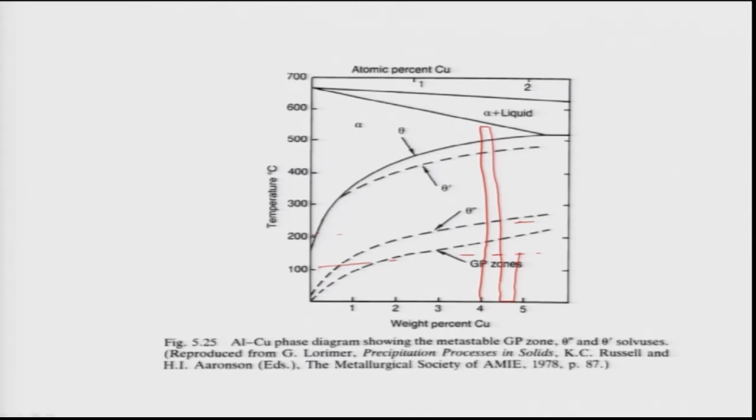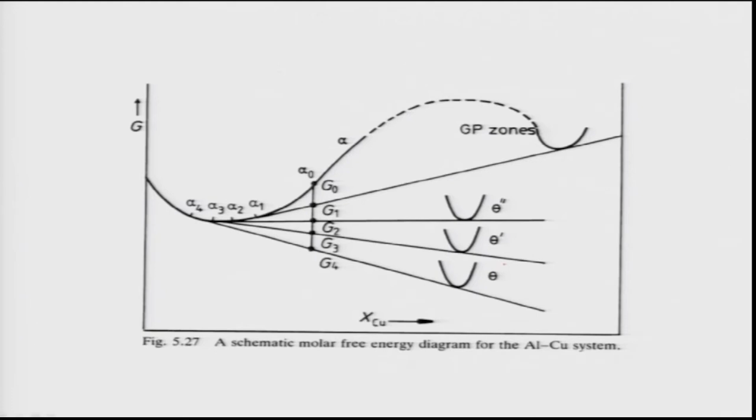And I have told you that this can be explained using a free energy composition diagram like this. Let us not go back into that. It helps you to explain different equilibrium compositions between these transient phases, GP zones, theta double prime and theta prime, with the alpha, and this can be easily described.

To give you a perspective, the GP zone is nothing but a few layers of copper atoms sitting on the 100 planes of the alpha aluminum lattice, and theta double prime and theta prime are coherent structures along different interfaces as described here. Theta double prime has coherency along all interfaces, therefore it retains low energy interfaces with the matrix.

Theta prime is coherent or semi-coherent along 001 planes, but non-coherent on 100 or 010 planes. On the other hand, theta, the equilibrium precipitate, is a completely incoherent structure. So, the transient phases help us produce different kinds of interfaces between these phases and the matrix. This is what I told you. And some of the microstructures I showed you again, because this helps you to understand.

GP zones are nothing but an extra 1 or 2 layers of copper atoms on the aluminum 100 planes, so they lead to a strained matrix which is shown here. Similarly, theta double prime is also coherent along all interfaces. It can lead in the microstructure to a coherency strain, which we discussed in previous lectures. So this will lead to a strained matrix, seen here. These are the theta double prime precipitates.

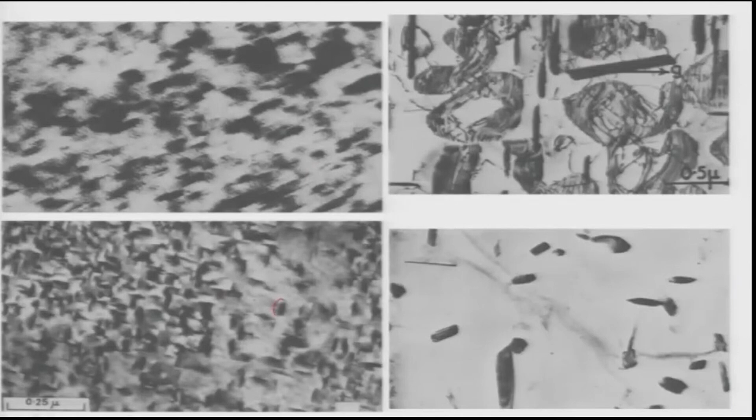Theta prime precipitates look much bigger, elongated, and theta is a very well defined precipitate with no coherency along any of its interfaces. And obviously nucleation of these phases happens along the grain boundaries or dislocations, and this can be used to alter the microstructures. As you see here, a grain boundary is present on which theta is precipitated. Similarly, theta prime has precipitated along a certain grain boundary.

So it is possible to nucleate these precipitates along the defects in the matrix. That was recapitulation. Now let us first discuss what actually happens when you heat treat these alloys during aging treatments.

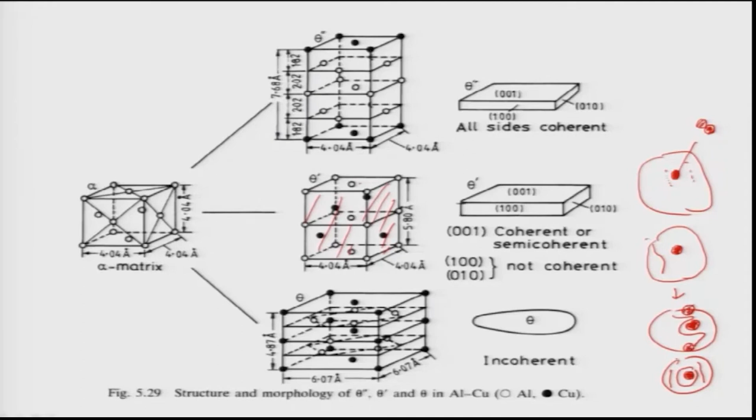So, more dislocations pass, more loops will be forming around these precipitates, and the stress field generated will be higher, and that gives this strength. But remember, this depends on the distance between these precipitates. The precipitates have to be at a particular separation, otherwise this kind of bowing of dislocation leading to formation of a loop will not happen. So, that is why the precipitate size must be a little bigger as compared to theta double prime.

Theta, on the other hand, is basically a completely incoherent structure. So, the only way a dislocation can pass through is making loops around it, and they will obviously be bigger in size because the growth will happen at a higher temperature and time. Because of that the material loses strength slowly, and that is why the hardness slowly drops off. So, that is the main reason why you see such aging curves in the microstructure or in

the real heat treatment. So, therefore, if I want to create a good material for various potential applications, we need to have combinations of good hardness and ductility, and that is only possible on this side of the curve, on the rising side of the curve. That is what I am showing you here in all the cases. So, if the heat treatment temperature and time are selected properly, hardness can be made on the increasing side of these hardness plots, and then we can achieve a good combination of strength and ductility.

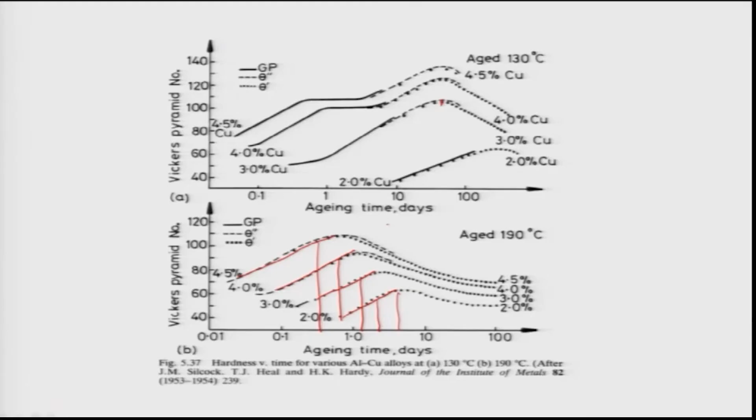That is what is actually done. So, the selection of the heat treatment temperature and time has to be judiciously done, otherwise alloys will not be applicable in real applications. That is a very important aspect which you must remember. There are other things you should also remember. These precipitates are forming or nucleating on the grain boundaries or on the internal dislocations present near the grain boundaries as well as within the grains.

So, we can improve the aging efficiency, or the ability of the alloy to age very nicely, by adopting two different approaches. One, which is very routinely done, is that after solution treatment followed by quenching, the alloy can be given a plastic deformation, simply rolling it or giving a forging treatment. By doing that, we create a large number of dislocations or defect structures in the sample, and then this is followed by aging treatment, that means the deformation is given prior to the aging treatment. Deformation leads to dislocation and defect structures, and these defects allow the nucleation of the precipitates very easily. So, one of the ways to achieve faster aging and better distribution of the precipitates in the microstructure is to give a plastic deformation prior to the aging treatment.

The other way is to use what is known as double aging treatment. Double aging treatment means we can have aging done at a lower temperature, something like 120 degrees Celsius, and this will only lead to formation of GP zones. A large number of GP zones will form because other precipitates will not form at that temperature. GP zones will preferentially form across the whole sample. Then this sample can be taken to a higher temperature, something like 170 to 175 degrees Celsius, and kept there for some time. As the GP zones have homogeneously formed because of the lower aging temperature in the first stage, this will allow the precipitation of theta double prime and theta prime easily on the GP zones.

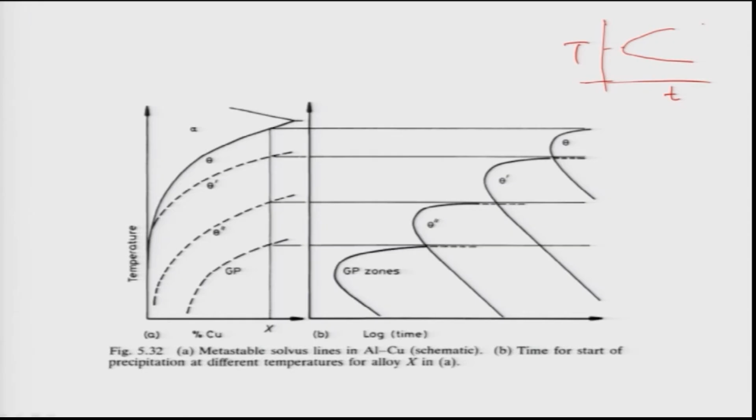Now we can have something like nucleation and growth kinetics built into that, and these curves are obtained like that. Obviously this looks like a Johnson-Mehl equation which is available for the steels. Why? Because if you look at any transformation, if I plot temperature versus time, transformation will be maximum at some intermediate temperature; at higher temperature it will be lower, and at lower temperature it will be lower. This is mainly because at higher temperatures the driving force available is low, so therefore nucleation and growth rates are low.

But at lower temperatures the nucleation driving force will be higher, but because diffusion is slow, growth will be slow in a precipitation hardenable or diffusional transformation. So that is why you always see a C-shaped curve. At the intermediate temperature, both the optimum value of nucleation rate and growth rate can be achieved, because diffusion as well as the driving force both have to be optimally chosen. And that is why all these curves have a C-shaped nature.

And GP zones, because they form at a lower temperature, will be starting at a lower time scale and lower temperature both, followed by theta double prime, theta prime and theta. So these curves allow you to select the heat treatment cycles, right. You can clearly see this is the log time, this is the temperature.

So if I simply do a double heat treatment, first I can simply allow these things to happen like that. So a large number of GP zones will form in the microstructure, then I can heat it up to a little higher temperature and keep it there a long time. So it will allow me to form a large number of theta double prime on the existing GP zones, and that is why it can be done.

In fact, in many actual practices, sometimes people give a 3-stage heat treatment, heat it up and keep it there also. So you can actually have combinations of GP zones, theta double prime and theta prime forming in the microstructure and give you the optimum value of the hardness. So such TTT curves or time temperature transformation curves allow you to select your heat treatment cycles very nicely. Okay, so that is the important part.

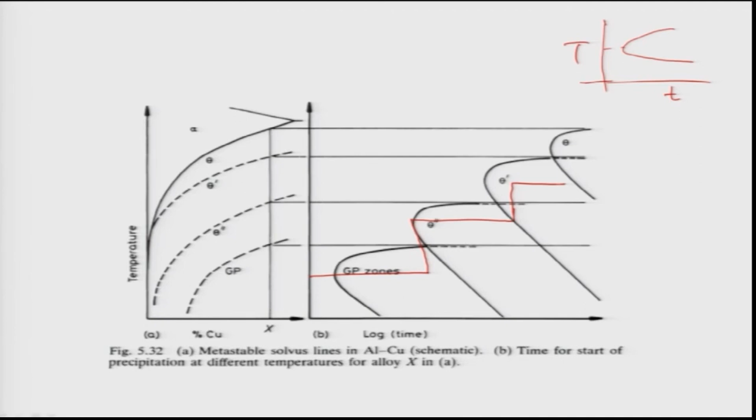And another important thing which I should discuss is important because of the heat treatment cycle which you do. Remember that the first thing we do in the heat treatment cycle is solutionizing at a high temperature, something like about 500 to 550 degrees Celsius for the aluminum copper alloys. At the solutionizing temperature, all these theta prime precipitates get dissolved into the alpha matrix, and since this is done at high temperature, a large number of vacancies will be created.

As you know, the equilibrium number of vacancies depends on the temperature in a particular material. So at high temperature a large number of vacancies will be created, and they will remain as equilibrium defects. Now as a part of the heat treatment, this high temperature solutionizing treatment is always followed by quenching to room temperature. So as we quench to room temperature, all these vacancies which are formed will be quenched in the microstructure.

Now these vacancies quenched in from high temperature to low temperature have a very important role to play, because these vacancies can coalesce and form vacancy loops, and they can also form dislocations. They can also lead to cross slip of dislocations. But the most important thing they allow is the diffusion of the copper atoms, because diffusion normally happens in substitutional solid solutions by vacancy movement.

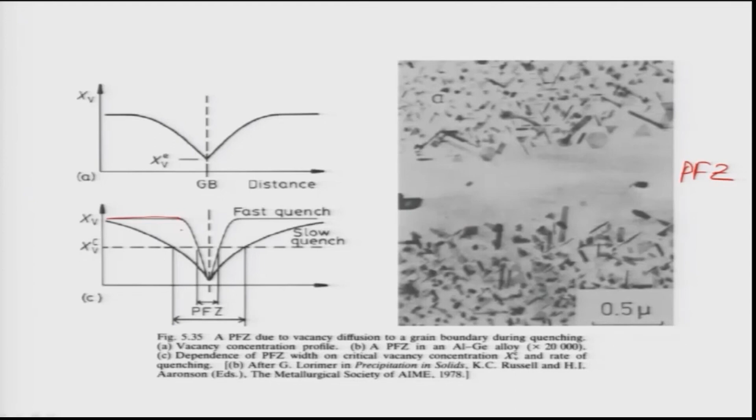If you quench very fast, as you see here, you retain a certain amount of vacancies inside the grain, but at the grain boundaries there is a rapid drop of the vacancy concentration. That is because the grain boundary acts as a sink for the vacancies. Vacancies will go and get lost in the grain boundaries. So there will be reduction of the vacancy concentration in the grain boundaries, and because of that the copper atoms cannot form these GP zones and precipitation is not possible.

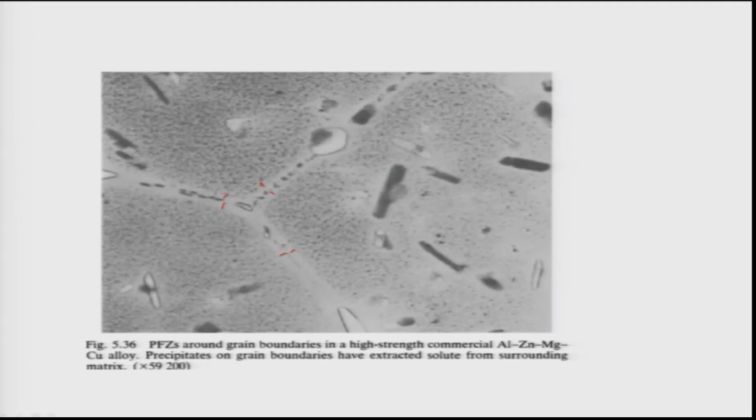This is widely observed in the microstructure, like this one you see here. These are three grain boundaries, or three grains meeting at a point. So near the grain boundary there is a precipitation free zone present, which is widely observed in the aluminum zinc magnesium copper alloy, and these precipitates here are also theta GP zone and theta double prime.

Gamma has a hexagonal structure, and because of that these alloys also undergo precipitation hardening. And the way things happen is this, again let me not discuss the whole thing. Alpha 0, which is the supersaturated solution, first forms alpha 1 plus GP zone, then it becomes alpha 2 plus gamma prime, and then alpha 3 plus gamma. Remember, gamma prime and gamma both have hexagonal structure. On the other hand, alpha has an FCC structure.

So therefore, the only orientation relationship which can lead to coherency between these precipitates, basically gamma prime, and the matrix is such that the 0001 plane of gamma prime must be parallel with the 111 plane of alpha. Similarly, the 11-20 direction of gamma prime must be parallel with the 1-10 direction of alpha. So that allows coherency between the precipitates and the matrix phase, and it is specifically observed.

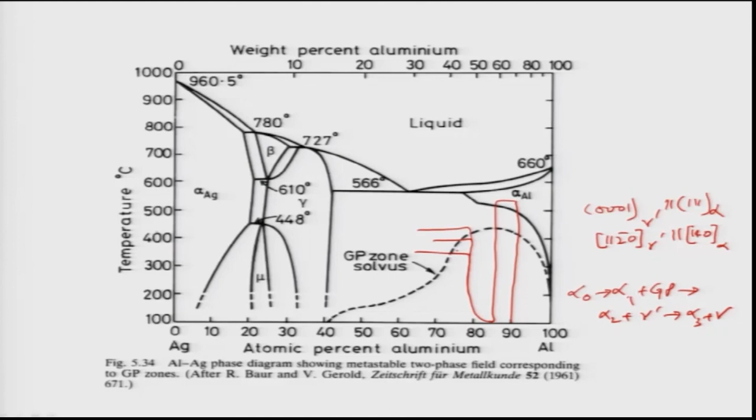The only problem is that because of the silver, which is an expensive material, these alloys are not used so much. But as you see here, these alloys can be used at a little higher temperature than the aluminum copper alloys, because the solvus shown here can go up to 450 degrees Celsius. So the treatments remain the same. You take any alloy, heat it above the solvus temperature, followed by quenching, and then one can do heat treatment at different temperatures. So that is the routine way of doing things.

Here again the final gamma precipitate is Ag2Al, and they are plate shaped. They look plate-like, like Al2Cu, and the behavior is almost similar.

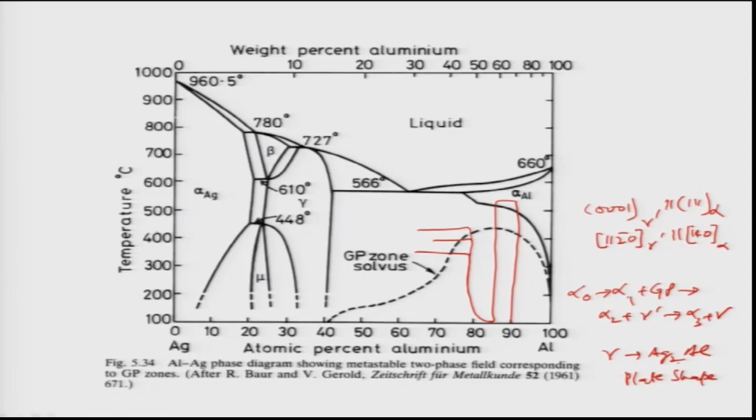Okay, so let me stop here for this portion of the lecture. So precipitation hardening alloys are an important class of alloys, and these phase transformations should be well known to all of us. And there are many such alloys. I have only taken the example of aluminum copper to explain the different aspects of precipitation hardening, and I have given you at the end some example from aluminum silver alloys. So in the next lecture we are going to start with another diffusional transformation that is known as eutectoid transformation.